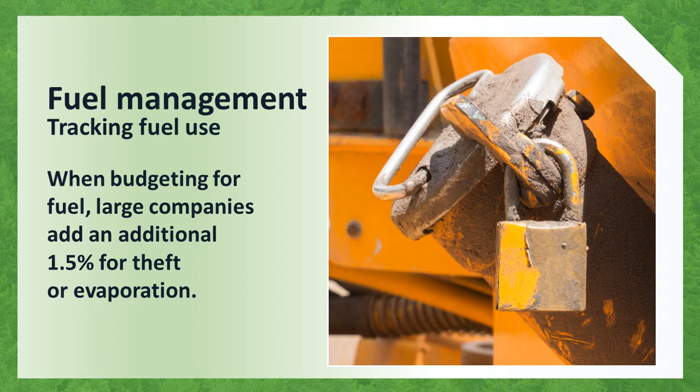An operation's profits can be dragged down by one bad machine. There's no way to tell unless you track fuel consumption. Have site conditions changed? Rising fuel consumption can be an indicator that you need to take corrective action for your operation. It can also highlight the need to maintain a machine before its mechanical condition worsens.

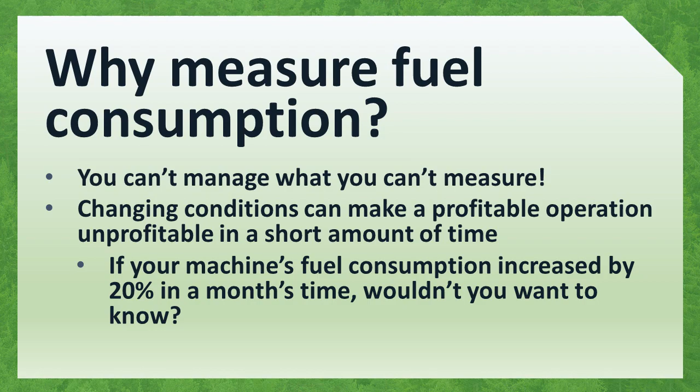Mechanical fuel meters are rugged and dependable and cost up to $300 for a more expensive model. These meters can be highly accurate once calibrated according to the manufacturer's instructions. Install meters downstream of filters to ensure that debris doesn't block the meter's internal working and impair its accuracy.

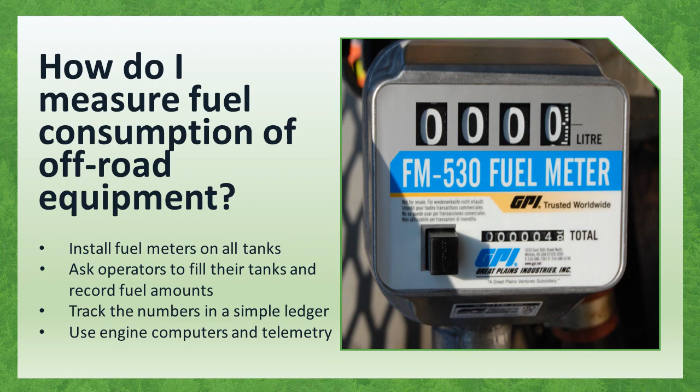Digital meters are smaller and easier to install, but they don't last in extreme cold or wet applications. As an alternative, new machines display fuel consumption on the operator's instrument panel, and the original equipment manufacturer's telemetry services, if offered, allow easy fuel tracking from the comfort of the office through a web browser.

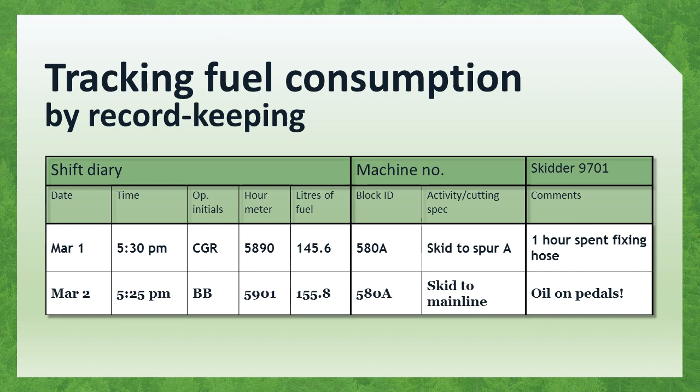Here's an example of a simple logbook for tracking fuel use. This kind of form can also be combined with payroll record keeping, which is a strong incentive for having the crew fill out the form every day. Filling out the form can provide historical data, as trying to figure out why fuel consumption has increased or decreased can be difficult to do without data to back it up.

The days of service recorder use are over, as the time needed to replace the cards and analyze the data output is considerable. Although the multi-DAT data logger uses older technology, it can be brought up to date with modern add-on devices. If you have some of these data loggers in your operation, consider upgrading them with J1939 serial data links, which can read the fuel consumption data from the engine control module, or the ECM.

Plus, if you install a satellite modem on the multi-DAT, you can view the data through the FPTrack web application, just like on the newer FPDAT and FPDAT2 devices.

The FPDAT and FPDAT2 devices offer native support for ECM fuel consumption on the J1939 data bus, just like original equipment manufacturer telemetry. Virtually all new machines offer telemetry solutions for tracking fuel consumption as well, which is worth considering at the time of machine purchase.

Keep in mind that all fuel values obtained from the ECM are estimates of fuel consumption. Reconciling and calibrating ECM fuel consumption with fuel dispensed from a metered fuel tank is essential for getting an accurate measure of a machine's fuel consumption.

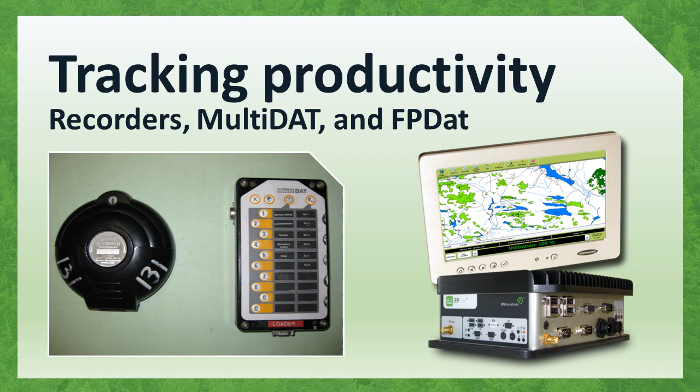You can get this advanced business intelligence by using log processor onboard production computers to track daily production, using map data from web-based telemetry to calculate hectares covered on a daily basis, grouping cutting unit data to track fuel use for unique or challenging terrain, separating these results from the others if you log units with different species or cutting specs to understand the cost implication of manufacturing a boutique or unusual log sort.

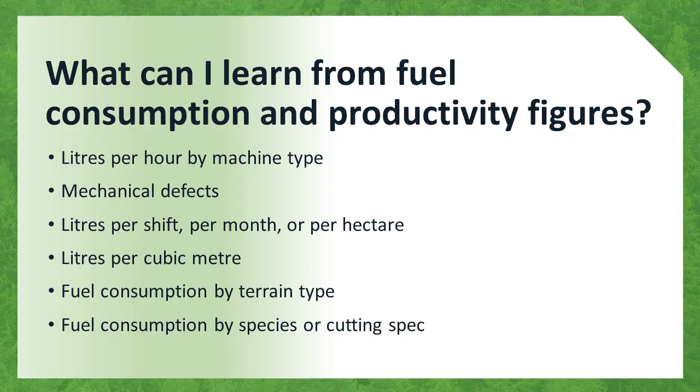Operations can drift from profitable to unprofitable. Recognizing this and adapting is essential. Costs change when operating conditions change. Bid accordingly.

Using the methods for collecting fuel and production data discussed previously in this lesson, let's work through two examples. The first will be an example based on time. The second will be based on cutblock or area.

First, we need to make a couple of assumptions. Each type of machine should operate on similar terrain. If work was different for each machine, you need to have a clear understanding of this difference to better judge the results.

Hours of work need to come from a reliable source. Use engine hours if necessary, but don't use payroll hours. Better still, use productive machine hours from a device that uses a motion sensor to measure working time.

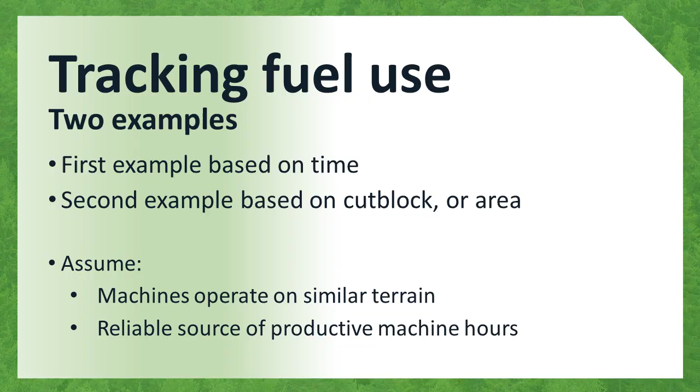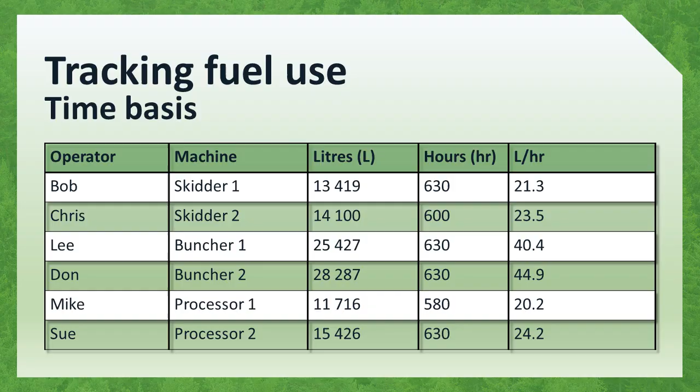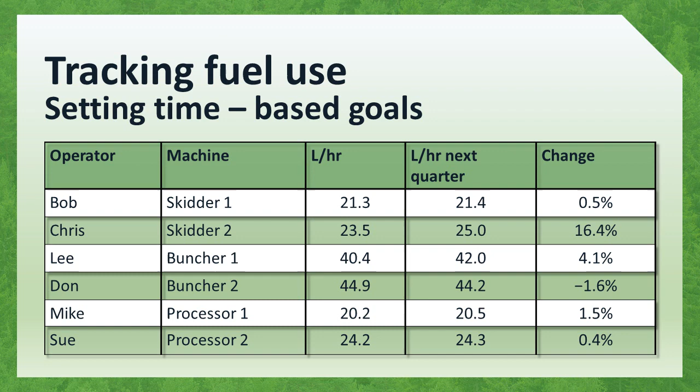Working from one quarter to the next, we see differences in fuel consumption. Focus on excesses. 0% to 5% is not significant, but differences greater than 10% are. In this example, Skidder 2 experienced a significant change in fuel consumption. What changed? A discussion with the operator or foreman is needed.

In the second example, based on fuel consumption and productivity that occurred in one cutting unit, we have to make some assumptions. Production is evenly distributed among the machines, which is unlikely. If you can integrate production computers, particularly those found on log processors, this can be refined.

If you have data from telemetry devices like FPDAT and can see on a map where each machine operated, such as with FPTrack, production could be based on the area treated, a useful refinement which can also be used to further your machine management. Using this data, we can see the energy intensity, or liters of fuel per cubic meter of wood produced. Once you start collecting this data, you will cultivate an eye for what is normal and what is not.

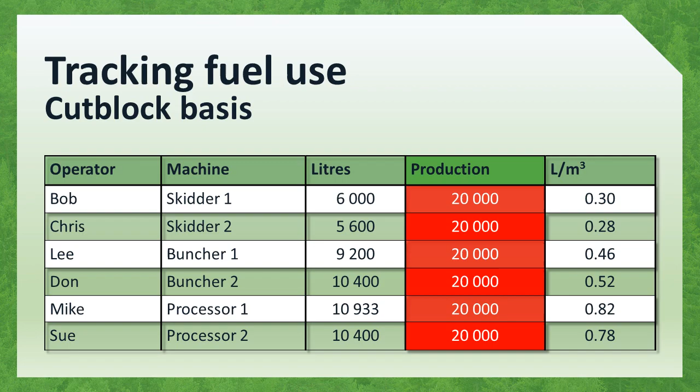Using energy intensity calculations for 2 or more cutting units, we can compare the differences on a percentage basis. Here is where we can gain the most knowledge about the machines and operators we manage. Here are some of the insights we can gain from this example. Block 2 clearly cost more to skid logs to roadside. Do you know why? Was the extra cost in your bid price? Chris was also less efficient. Was this according to plan? Was he tasked with operating on the more difficult ground, or was he skidding uphill?

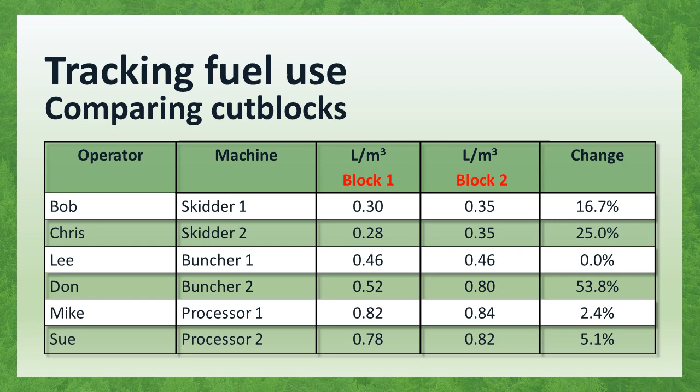Buncher 2 experienced a dramatic increase in energy intensity. Is there a problem with the hydraulic system that could be corrected? Look for the big numbers. They'll jump out at you from the data. Start improving your operations there.

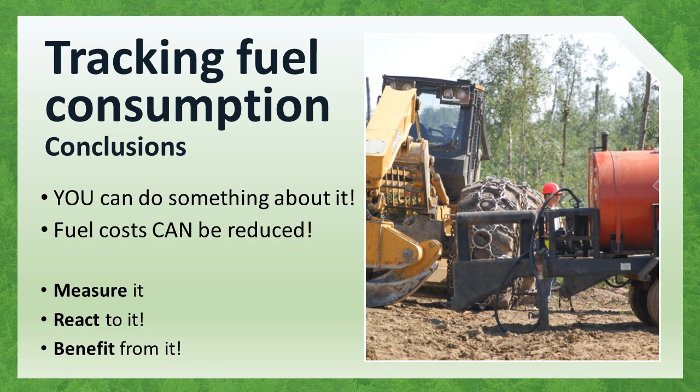In conclusion, tracking fuel use pays big dividends. You can do something about it. Fuel costs can be reduced. Measure it, react, and benefit.

What is an energy efficiency program, and why do you need one? You need an energy efficiency program if you want to make the most from your hard-earned investment in people and machines. It doesn't happen by accident, and if it did, you clearly wouldn't be making as much money as you could. A formalized program spells out the elements needed for success. Many such initiatives fail due to one or more critical steps being poorly conceived and executed. This small exercise in planning will make the most of your efforts.

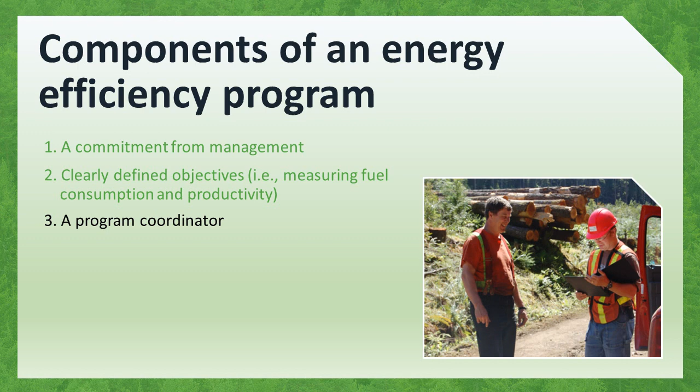1. A commitment from management. Management needs to back the program coordinator with the authority to make changes. Easy to do if they're the same person, as is the case in small companies. 2. Clearly define objectives. What is to be measured and accomplished? At program startup, you may only have one objective, to track fuel consumption by machine, for example. 3. A program coordinator or champion. One person needs to be tasked with seeing the program through.

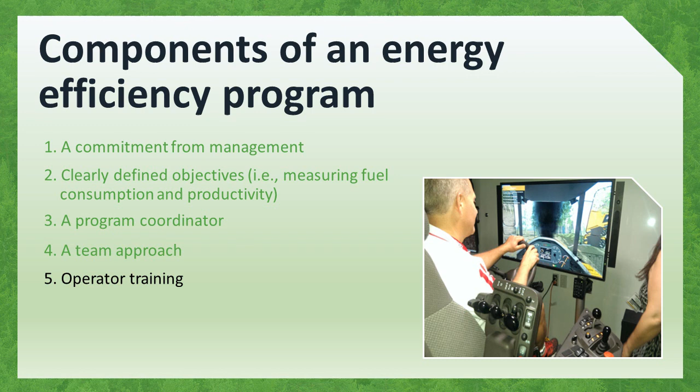4. A team approach. Get everyone involved and make everyone responsible for at least one element of the program. Let the crew know that the program is important and their efforts are needed and appreciated. 5. Operator training. Identify gaps in skills and provide training to bring your less skilled operators up to high producer levels.

6. Follow up on results. Show the results to your employees and explain why the results matter. Group and individual discussions are needed, as some employees may need extra time to digest the meaning and importance of the message that you're trying to convey. 7. Dialogue or coaching. Coach new hires in best operating practices. Don't just hope and pray that it all works out.

8. A performance incentive program. Give employees a reason to perform better. This is a whole new topic, which we will talk about in the next slide. Motivating your operators can be a complex task. Much has been written about performance incentive programs. Done wrong, and they can demotivate your workforce. It's important not to lose sight of the goal and your audience.

You need simple motivation tools that speak to your workers in a manner that they can relate to. Keep it simple. Consider providing feedback by including results with pay stubs. For less educated crew members, a one-on-one discussion is better. And better yet, if there are good results, share them with the crew as a group. Simple things like gift cards or improvised barbecue lunches can go a long way in building morale and a cooperative spirit.

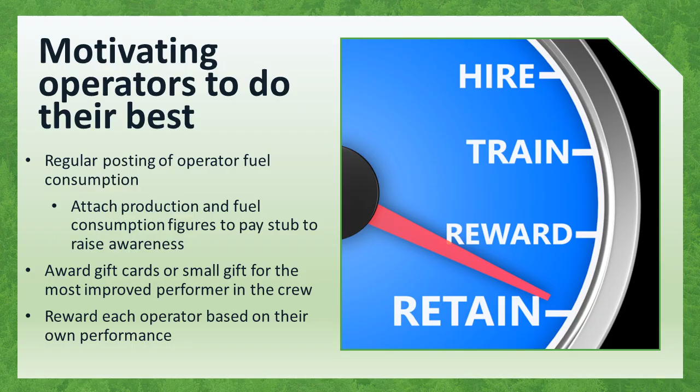In this lesson, we have learned how you can better manage your fuel cost using simple fuel meters or more complex telemetry systems. We have discussed the benefits of tracking production and fuel use and how these practices can support an energy efficiency program. Remember, you can't manage what you can't measure. Join us in the next lesson, where we will cover how you can improve the operation of your machines through better maintenance and operator practices.